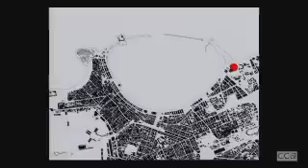It was originally a half crescent, and there was a small island where the lighthouse of Alexandria once stood. That island was disassembled, and they created a kind of causeway that helped protect the harbor better than it had been in the past. And the red circle you see here is the location of the new library, which was also the place where Cleopatra had her palace and her museum, and where eventually she committed suicide.

There are, of course, many wonderful stories from Alexandria. Many of you may be familiar with the love triangle of Julius Caesar, Mark Antony, and Cleopatra, as well as wonderful poems by Cavafy, and Forster was a great writer there. It's a kind of rough city, but when you enter it with the eyes of history, it's a wonderful place.

One of the things we noticed was that very quickly there was a need to ensure that this coastline was protected. It's a very, very long city. The site sits alongside the rest of the city, which is about 70 kilometers long and only about 7 kilometers wide in some places—very narrow, long city along the harbor front. That connection of this part of the city to the original city was very important to us.

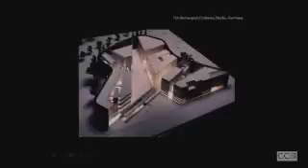That facade faces into a public space, and it's made out of a solid piece of stone that we decided to bring from Norway to Germany, directly to Berlin. The piece of stone required was something like 15 meters high, 5 meters wide, and about a meter deep, so it would weigh up to 130 tons.

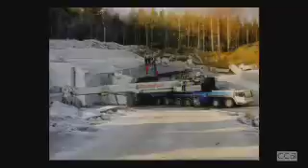When we proposed this to the client, they were a little nervous. They said, why can't we just cut the stone into small pieces and send it in little boxes like everyone else? We thought, well, you could do that, but actually it may be cheaper. We talked to people at the quarry, and it turns out that cutting the stone this way produces about 30% less waste, and it was 25% cheaper because there was less labor involved in setting the stone up. So they finally agreed, because it was cheaper, and if it's cheaper, apparently you can't say no.

So we went to a quarry and peeled back the topsoil. This is a granite ridge that ran under the topsoil, carved by glacial ice about 30,000 years ago. This one particular stone was found to be free of cracks and easily removable, so it was taken out in one piece. It actually only took 4 days with about 5 people to remove it, and as you can see, the surface was left intact.

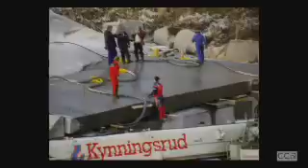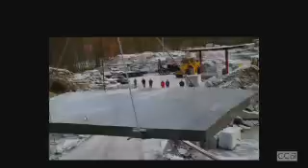Then it was time to hoist the stone out of the ground, and that was a very exciting day. You can see the ridges carved by the glacial ice, still part of the surface of the stone, and that was meant to be the actual facade of the building.

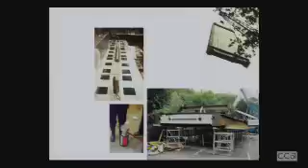It was placed on a boat near the quarry, then sailed to Berlin, lifted out and put onto another smaller boat, moved along a canal, then lifted by a crane and dropped into place. Because the stone is so large and heavy, it holds itself up by its own inertia, so there are no bolts and no fixed foundation system. These little nipples fitting into those holes are the only things holding it up. It's basically holding itself up.

Amazingly, the German safety authorities would not allow the stone to actually hold the roof up, which it was designed to do, because they said natural materials cannot be trusted since they can't be tested. Their test was to take a piece of stone, load it until it broke, and then you'd know how much load it could take—but then you'd have to get another stone and do the same thing again, so this would happen in perpetuity. They forced us to place columns on either side that weren't part of the original design. So the stone is actually holding up the roof, but the columns are there because we had to put them in. We made them removable so that one day they could just be taken out, once everyone in the building department dies off.

So there is the facade, which is this rather beautiful idea of taking the earth and literally rotating it 90 degrees. Its surface is purely the natural form of the earth lifted upright.

We did a few other small projects. We made this very small museum on the west coast of Norway that was published a lot in America, and in fact we lectured many years ago, I want to say '92, for the San Francisco Museum of Modern Art at Yerba Buena, and they used it on their poster, this little museum, which was for a very small group of pensioners, all of them over the age of 70.

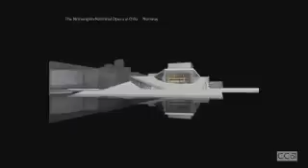This is a project which many people are aware of, and after the Alexandria Library was finished, we thought, well, we didn't know exactly where we would go. We enjoy working with cultural buildings and working with buildings that a lot of people use.

So we entered at the last second, really literally 5 weeks before it was due, the National Opera Competition in our backyard in Oslo. This was one of the drawings made just shortly after the competition. To give you an idea of the site in relation to our office, that's the office that I showed you earlier, and that's the site.

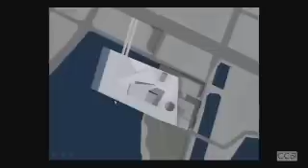So we could literally look out the back window, and it was nice not to have to fly 5 or 6 hours to see the site, and we were able to go there regularly. But it was a very difficult site in that it was partially on land and partially in the water, and it was adjacent to the historical center of the city founded by the Danes 400 years ago. The city of Oslo is about 1,000 years old, so there's a lot of archaeological remains under the ground in many places. They found a couple of old ships, one Viking ship near this site.

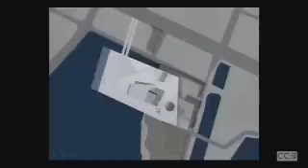Our building is actually partially on land as an idea, and we wanted to expose the portion in the water as being a part of the water rather than filling out the land and creating a sort of artificial quay for the building. You cross a small bridge - this is a competition drawing, but at that time we had 2 bridges, which eventually became one very narrow bridge onto a plaza, and then you enter into the opera itself.

The building in plan, although it feels quite complicated geometrically, the plan is extremely simple. And this is something else I also like to tell students of architecture: when you're given a very complex program, it's important that you understand how to edit things down and not be afraid of simplicity.

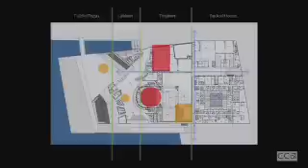In this particular building, 650 people work, some of them 24 hours a day, so they need to be able to have a mental map of the place that they inhabit while they work. A simple plan that has clear orientation and guidance for those people is very important.

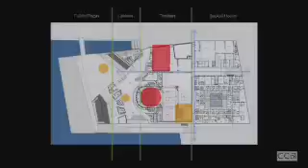You can see that it's kind of a very simple lamination of different functions: the plazas on the left, the lobbies, the theaters, and then the back of house workshops and the administration and so forth. Those 2 blue arrows show the primary circulation routes between the front and the back of house. That's really all there is to it. You wouldn't necessarily understand that when you see the exterior of the building, but it's these 2 worlds coming together that create the richness of the design.

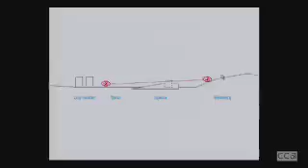Another important thing is that the profile of the building, like the Alexandria Library, is rather low. We brought the profile of the building down as far as we possibly could, because the city is divided into 2 parts, the center and the growing domestic areas towards the east and the northeast. Most architects entering this competition created a large edifice that blocked off views to and from the city. Our building is, in fact, a kind of link between the 2 portions of the city.

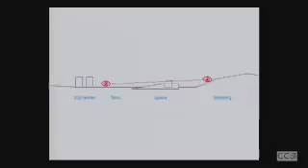You don't look at the opera, you look past it, or you look through it. So I often say that our buildings, and this building in particular, it's a verb, it's not a noun. It's not an object in and of itself. It's connecting a larger number of objects together.

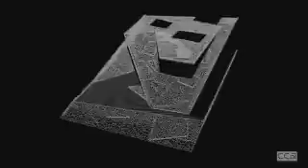One of the key features to make that happen is the roofscape, which literally ascends from the saltwater of the Oslo fjord up to the roof of the opera. That was a quite difficult piece to create. It's, I believe, 23,000 square meters, 240,000 square feet of hand-carved marble. Each piece was hand placed and is unique.

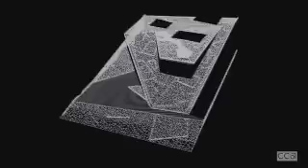We actually tried to create a scripting program to lay out these drawings, and the computer could only finish about 90% of the actual design, and then it blew like 3 computers, so we had to finish it off by hand. I love that idea that we had to finish the computer drawings by hand to get it to work.

Here is the primary view of the opera from the fjord as you approach it. This was the day after the opening, but the building actually was opened before construction was complete, and they had put an ad in the paper saying, you can come see the opera before it's finished, and something like 15,000 or 13,000 people showed up. They only had 4 security guards, so it was a kind of a mob.

The same was true the day after the opening. Thousands, I think 33,000 people came just to traverse the roof and to enter into the opera itself and to go down and touch the water, which is actually a unique experience now. As you know, even in San Francisco, engineers and traffic planners have distanced us from the water, and you can see the water, but you can't always touch it. It's usually a 3 to 8 foot drop between where you stand and where the water is, and this sort of brings back a natural condition into the heart of a city.

To get to the main plaza, this very narrow bridge funnels everyone into a very tight space, and when the building is fully occupied and when you're entering for the night of a show, you literally have to rub shoulders with strangers to get across this bridge, and that sort of resets your psyche as you move into a fairly complex and rich cultural facility.

As you enter onto the plaza itself, you're able to see up to these new platforms, and there's something very unusual about seeing people at these kind of odd angles. There's a direct response that the human body has, and as a human being, to have to navigate over somewhat unusual shapes changes your connection to the place that you are. So rather than just putting one foot in front of the other, your body is slightly shifting on its axis, and this creates a very intrinsic link to the space that you're in.

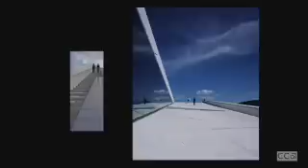This is a view of the stairs, and actually there is a staircase. Most people think it's only ramps, but we have actually integrated a normal stair that you can use on the sides, so you don't have to take the ramps if you don't want to. Interestingly, I'd say 90% of the people don't want to take the stair, even though it's there and it has to be there by code.

It also has a capacity to come back to the water, and there's one very beautiful quality that this ramp creates as it dives into the fjord. Because the water cannot be made precise, and the algae and everything that grows on this little granite toe is imprecise, the line that runs along that portion of the ramp is very impure. It's hard to discern where it is, where it stops - it's moving all the time. In contrast, where it lifts up off the water, it's very clean and very pure. So there's this distinction between softness and hardness all occurring in one location.

So here's some pictures of that piece throughout different times of the day. The quality of sky and the color of sky is quite beautiful in these northern regions. And at night, obviously, the building takes on a new identity, and you can see the entry a little more clearly there. As you cross the plaza into the entry, this, by the way, is where those ballet dancers were, the little girls standing in that space in that one picture.

This is the way into the opera hall and lobby itself. Once you're greeted by this large opera plaza, you're compressed down into this very low opening, and from that you move into a space which is difficult to define, certainly not a domestic type of space, very organic.

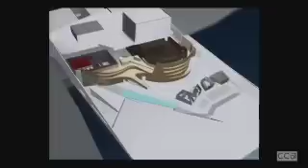The idea here was that not all shows sell out, so it's not always a full audience, and you want the lobby to feel comfortable when a show is only half full. So this organic shape allows different groups of people of different sizes to interact without feeling uncomfortable if it's too full or not full enough.

One of the unusual challenges we had was, again going back to the idea of cost, in order to save money it was made as a design-build project, so we actually had to design and construct the foundations before the plan was finished for the actual building above. So we created all these foundations before we finished the design of this portion of the building.

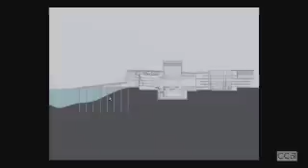What happened was, as we moved forward with the project, we realized that the pile foundations that went deep down into the clay did not line up with the structural beams that we had planned and needed in certain locations above. So after a month of trying to get everything to line up, which was really difficult, we realized: why do we have to get everything to line up? It doesn't have to line up.

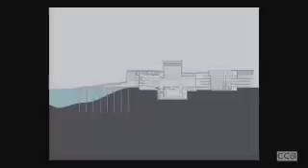All we have to do is just connect the dots from this point here to the pile cap, and that created these very unusual column shapes, which appear to be the architect just being silly, but in fact, it's a very efficient way to do this.

There's one pile cap there, there's another pile cap there, and those are the lines of the roof beams, and they're connecting down. You see they're thicker in the middle, because that's where the greatest buckling moment is. They also are sort of almost wild in their appearance.

One other unusual feature is that as you're moving outside the building, people are naturally drawn to the glass to want to see what's inside. So everybody sort of comes up and sticks their nose up to the glass. And the funny thing is that once they get close enough to the glass and can actually see through it, they often jump back because what's on the other side is 200 people looking back at them.

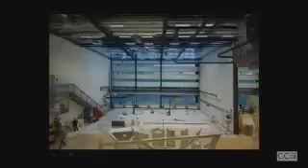There are very large workshops, all designed to have natural light. We added glass into the sidewalk level so that people walking by could see into the opera and see what's happening, also into the workshops where they make wigs and costumes.

And the rehearsal rooms are lifted high up with a view of the city and the surroundings, and also very effectively and efficiently designed. I'm going to finish this project with a little picture of how the site looked 200 years ago.

So our project was intended to contain the pollutants, which we did throughout the process, and now it's actually possible to swim in the water again, and it's introduced a whole new layer of fauna and fish life and bird life there. So you'll see these amazing two swans, which often show up. They began to appear shortly after construction was completed.

And they're pretty much there all the time. So if you go to the opera, I'm sure you'll see them. And there's a kind of an attraction to this interaction. And there's that soft line I was talking about. And there's another sort of odd character back there, another piece of wildlife. We call that wildlife.

One of the things that was amazing was that after the opening night, we were, of course, very nervous. And we thought, will the acoustics work? Will everything work? You work very hard to make sure it will all work. But ultimately, as an architect at such large scale, you really need the presence of live audiences to fulfill the mission of the building. So we were very excited to read the critics the next morning, because the critics often have a clear idea of how a building operates.

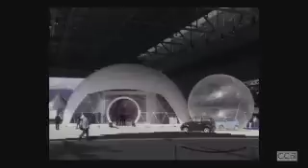One of the companies approached us in the development of their zero emissions vehicle, and they wanted us to help brand the car, not design it, because that was already done. The team working on it realized that if it only produces fresh air, you could put it inside a kind of big bubble, as they've done here, and there'll always be fresh air inside of it. They liked that idea, so they created a film, which I'll show you, based on that concept.

Yes, that was our foray into the branding world. It was very fun to work with different groups of people on that project. While all of that was going on, we were nearly to the end.

One day in 2001, it was a beautiful day in New York City, and this happened. Everyone has a story about what they were doing that day. It was a very traumatic day for many people, and remains traumatic for many even to this day.

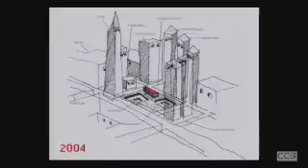So a great deal of our time was spent walking the design through large and complex groups of people who all had a vested interest as stakeholders in the project.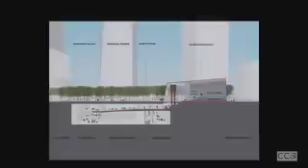It's a quite large building, about 200,000 square feet, but over two-thirds of that is underground, and that's actually being designed by another architect, Davis Brody Bond. We're designing the above-grade part, so it's one museum designed by two architects. Sound familiar?

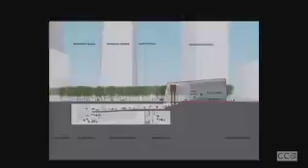There's great potential to really work together on the design of these two structures to make them function in a seamless way. Within the main atrium space, which allows light into the darker portions of the museum below ground, are placed two columns rescued from the original towers themselves.

The site is extremely complex. Most of us, when we think of property, think of it in plan - someone owns this land, someone else owns that land. But in New York City, property isn't just segregated in plan, it's also segregated in section. If you cut a section through this site, there are 5 different owners sitting on top of each other, so you have to navigate gravity through 5 different owners. Actually, there are only 3 owners, but 5 different subsets combine to create the different qualities of ownership on the site.

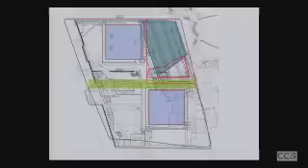So these are some of the overlapping primary components where our site is. We did this kind of fancy dance of getting the columns to line up, and we had the same problem we had with the opera. So in the end, we decided not to have anything line up, and we just allowed the columns to be what they were. You'll see that in just a moment.

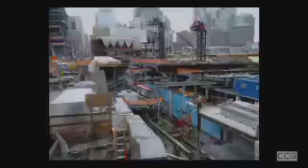This photograph is literally only two days old, so I was there on the site two days ago. This gives you an idea of the enormous complexity at the site. It's moving very, very quickly. I was trying to find a way to show scale, because it's impossible for you to really understand the scale, but I did my best with a couple of images.

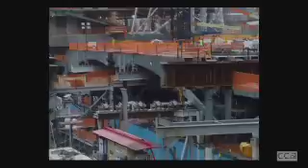This next image is just a detail of this very same image, not a separate picture. As you get closer, you begin to see all the layers of different projects, one on top of the other. The size of these things is also very hard to tell, but there is one picture I have - this is about 16 feet deep. So there's a kind of sense of it.

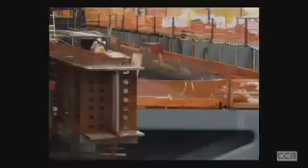All of these beams are cantilevered and post-tensioned, all kinds of things going on all at once, all weaving together. And that's our building back there, sitting on top of all of these other structures.

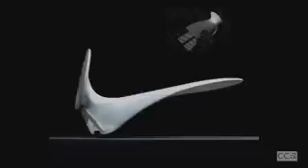The jazz festival there is so popular that not everyone can actually fit in front of the stage or afford a ticket. So often people sit behind the stage, can't get a ticket, and just listen to the ambient sound and have, I guess, a party. So we created a band shell that not only threw the sound directly towards the paying audience, but allowed a little bit of the sound to leak out the back to the non-paying audience.

So this structure is a multi-acoustic form that treats the two different audiences on either side of the stage. It can be erected in about 3 days, stored in 3 crates for most of the year, and it's only up for a couple of weeks. This is right when they put it up.

It's both pneumatic and tension structure. The cables you see are actually unnecessary for the structure. It's completely self-supporting, but the fire department made us put them in case it ever caught fire. It can actually withstand uplift and be a fully supporting structure.

As it's built up, they still use the area underneath it for parking cars, and slowly it becomes more and more used by the participants of the festival. At night, the acoustic oculus also becomes a visual oculus, allowing you to see the sky pass by during the events below.

It's sort of become a kind of an unusual icon for this very tiny little semi-traditional town.

We've made a one-room museum in Sweden. It's got one picture in it—kind of exciting. We've made a small bench in Guatemala, which we just finished recently.

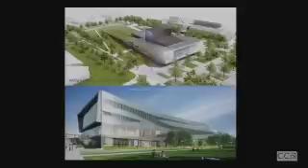As mentioned earlier, we're making a few projects here in North America. This is a collaborative art school in Ohio on top, and a library in North Carolina. This is one of the music halls in Canada that we're doing in Kingston.

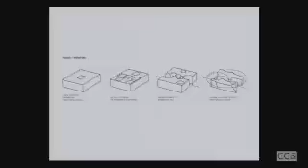We just won this—a museum in Guadalajara for natural and environmental sciences. It's based on the notion of bringing together a Spanish colonial identity of architecture with the natural way in which canyons and valleys form microclimates in the region around Guadalajara. Putting those two things together creates a building something like this.

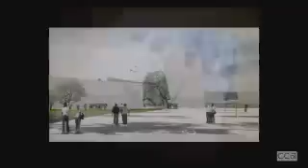These are some of the views of it, and that project is starting now this summer. It's collecting rainwater from the site and using all the natural qualities of the climate to run the building.

As was mentioned earlier, we're reconstructing Times Square all the way from 50th Street to 40th Street, 7th Avenue, and Broadway, making it more comfortable for both New Yorkers and tourists. I can't yet show you any designs because it hasn't been released to the public, and similarly, I can't show you any designs for our work on the San Francisco Museum of Modern Art.

We've been working very patiently to develop the project together with a clear understanding of the program and the budget, to make sure everything is healthy. One of the things I'd like to say is that we understood the history of the museum as being very important, as it once was within the Veterans War Memorial Building. There was a tremendous need to contain and occupy territory within that building as it existed for many years. And of course, when the choice was made to go South of Market and the Botta Building was created, there was very little context around the building, so it created a sort of parenthesis, a place that anchored culture in that part of the city, and it was very successful, and the city has grown up around it.

Now that the city has grown around SF MoMA and it's becoming more lively, we see there are more connections this building will have to the city. We understand the future of the museum to open itself up to the community and be more connected to the people around it that use it. So that's a big part of the future of the museum, and we're excited to be a part of that. So I'm pretty much finished.